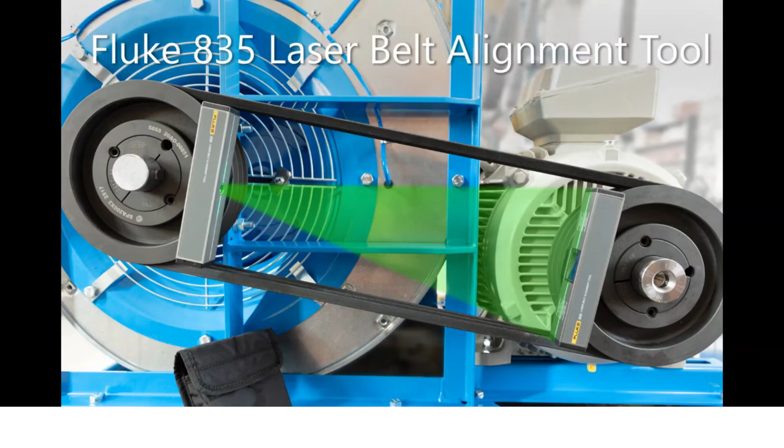Welcome to this short video on how to use the Fluke 835 following 4 simple steps.

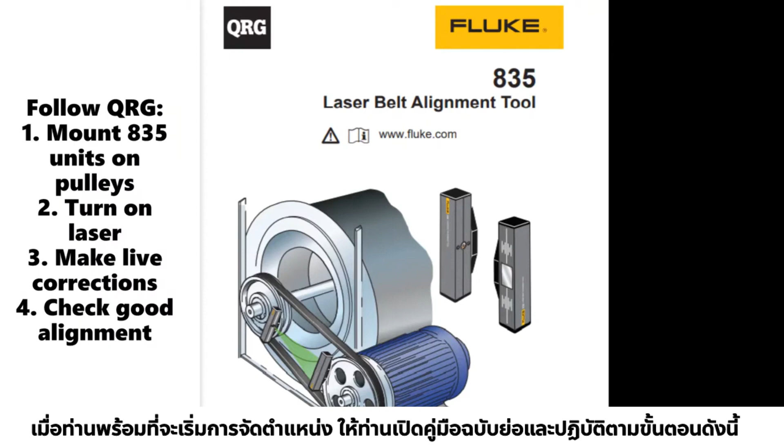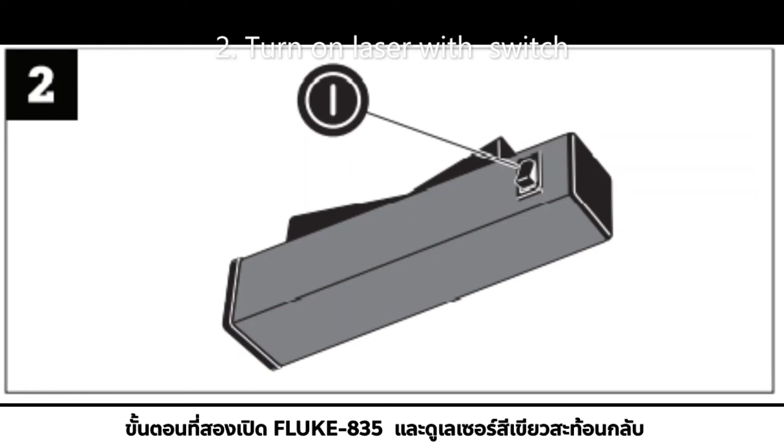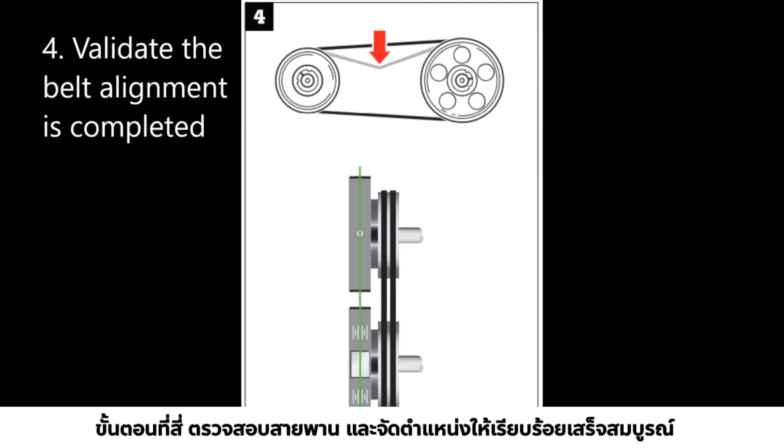When ready to start the alignment, take out the quick reference guide and follow the steps. Step 1 is to mount the 835 units onto the belt pulleys. Step 2 is to turn on the 835 and see the green laser reflected back. Step 3 is to take measurements while making live corrections to the motor feet. Step 4 is to validate that the belt alignment is completed with the 835. Now let's quickly walk through each of these 4 simple steps.

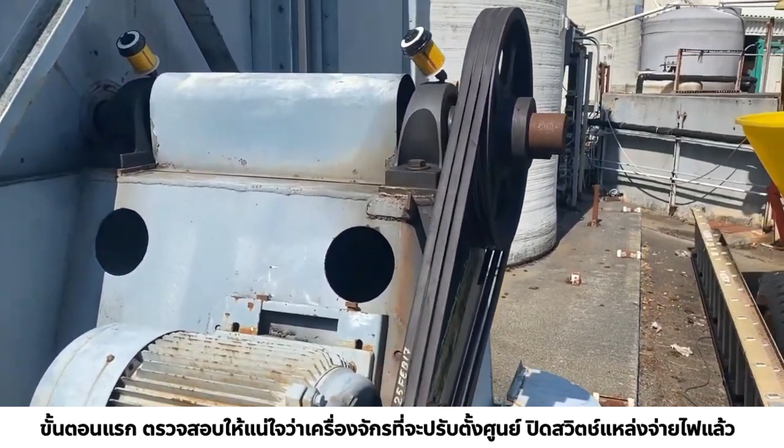Step 1 from the quick reference guide. First, ensure the machine to be aligned is isolated and tagged out from the mains power. Remove the covers protecting the pulleys and belts in order to mount the 835 units. Here we see a machine that is ready for the alignment correction.

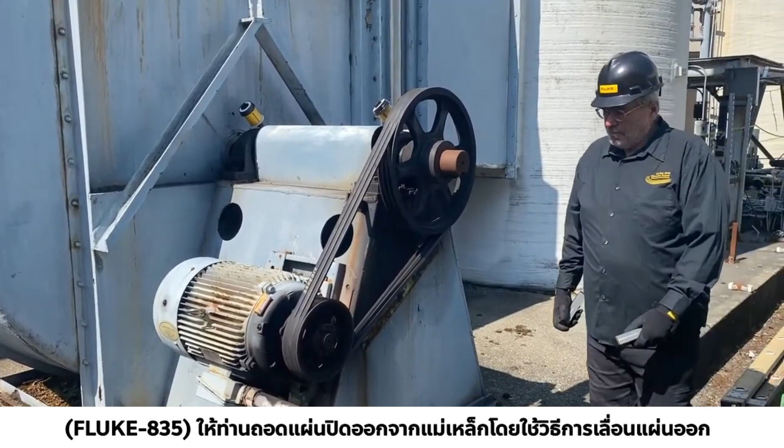Remove the cover plate from the magnets by sliding the plate off. Due to the powerful magnets on the units, mounting on almost any pulley face is easy. Mount the units on the faces of the pulleys to be aligned. The reflector should be mounted onto the machine to be moved, while the laser transmitter is mounted on the stationary machine. Under normal circumstances, the movable machine is usually the smallest mass, in most cases, the motor.

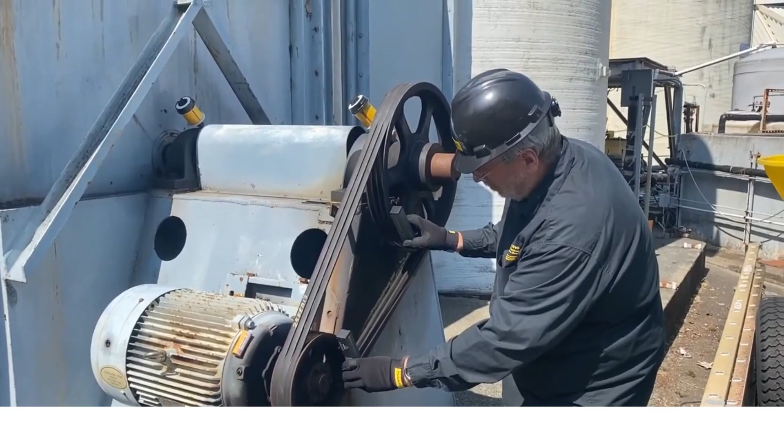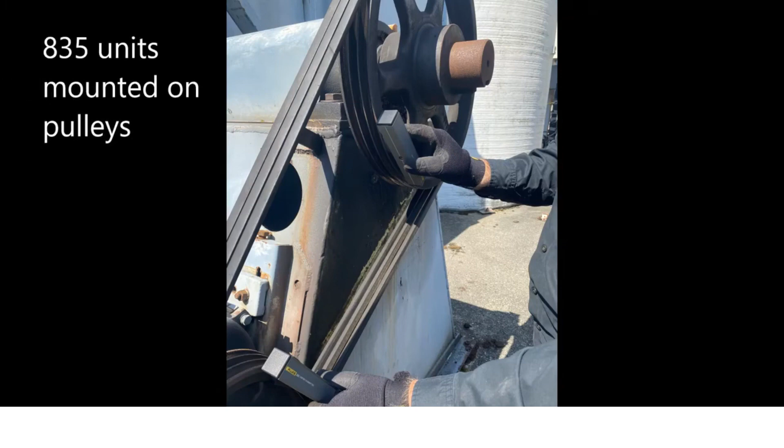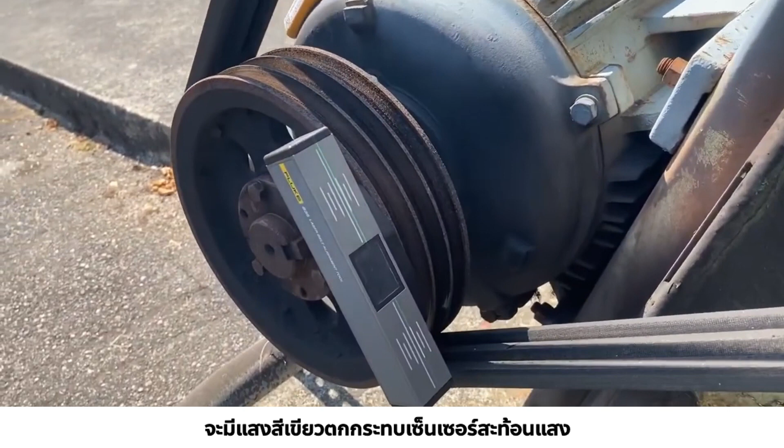Step 2 from the quick reference guide. In step 1, we mounted the 835 units. Now we will power on the 835. Here we see a machine with the 835 units mounted on the pulleys. Press the button on the laser unit to turn on the 835. See the green laser on the reflector unit. Then, see the green laser reflected back onto the laser transmitter unit.

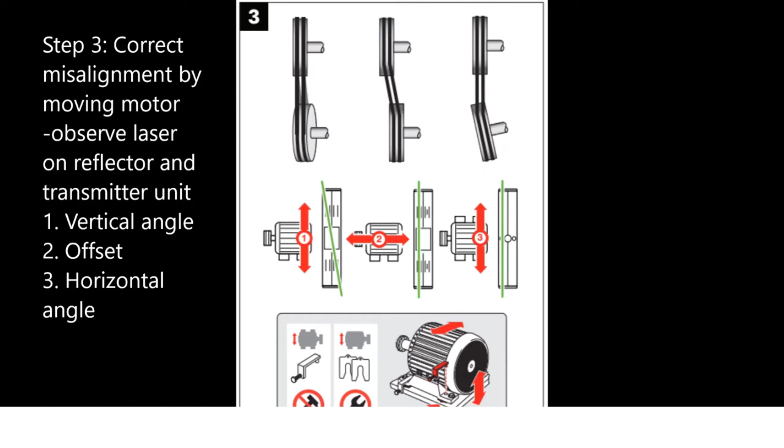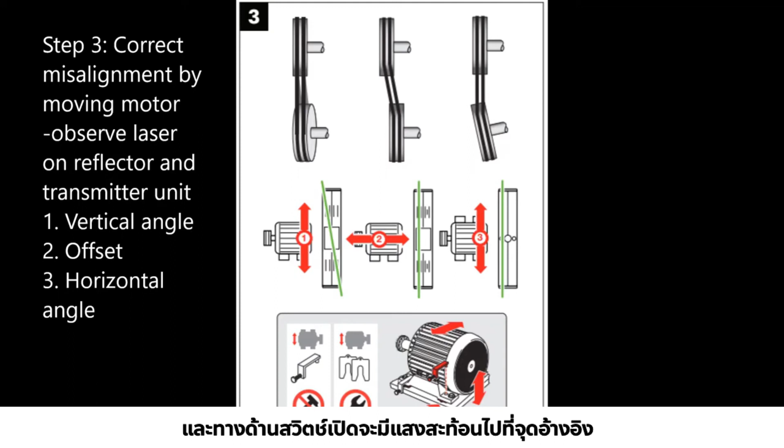Step 3 from the quick reference guide. Corrections are performed live by moving the motor vertically with shims and horizontally with pullers. The misalignment to be checked includes vertical angularity, horizontal angularity, and offset. The transmitted laser line on the reflector unit indicates both the vertical angularity and the offset. Horizontal angularity is indicated by the reflected laser line on the transmitter unit. Here we see a machine with the 835 units mounted with the green laser lines.

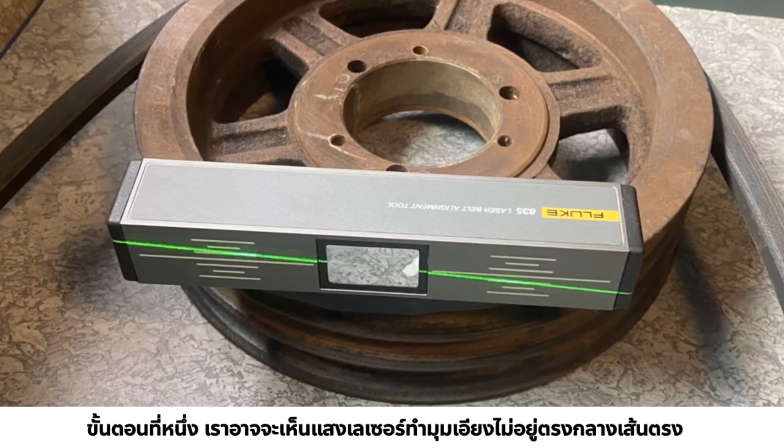First, the angular misalignment can be observed on the reflector unit during adjustment. Correct vertical angularity by shimming the movable machine. Second, the offset can be observed on the reflector unit during adjustment. Correct offset by adjusting the movable machine axially end to end. Third, horizontal angularity can be viewed on the laser transmitter unit during adjustment. Correct horizontal angularity by adjusting the movable machine laterally side to side.

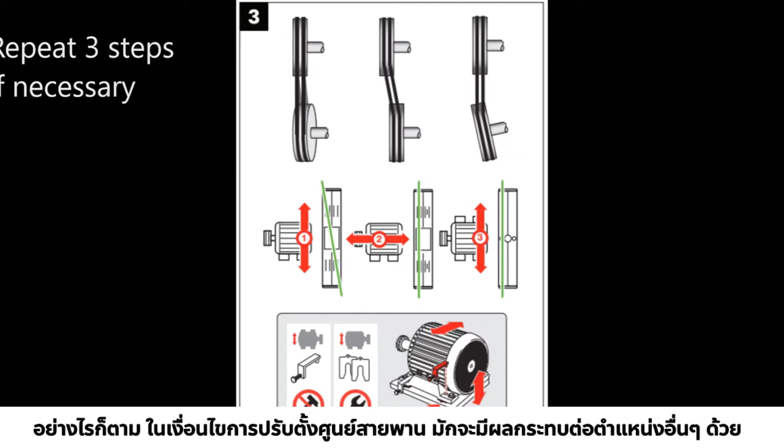Step 3 from the quick reference guide. By following the simple steps, alignment of the belt drive should be quickly completed. However, as any one alignment condition is liable to affect the other alignment condition, repeat the 3 steps if necessary until the system is aligned. In the final step, validate good alignment.

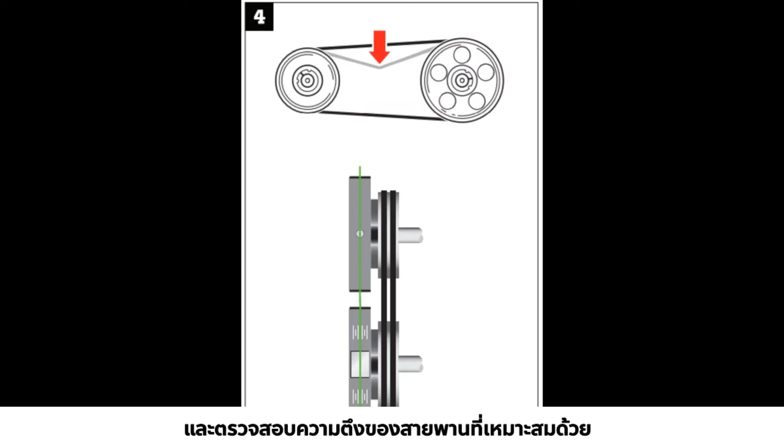Laser lines harmonize with reference lines on both units. Also check proper belt tension. Here we see a machine with the 835 units mounted with the green laser lines reflected. Good alignment is achieved when the transmitted laser line and the corresponding reflected laser line harmonizes with the reference lines on the reflector and the laser transmitter units.